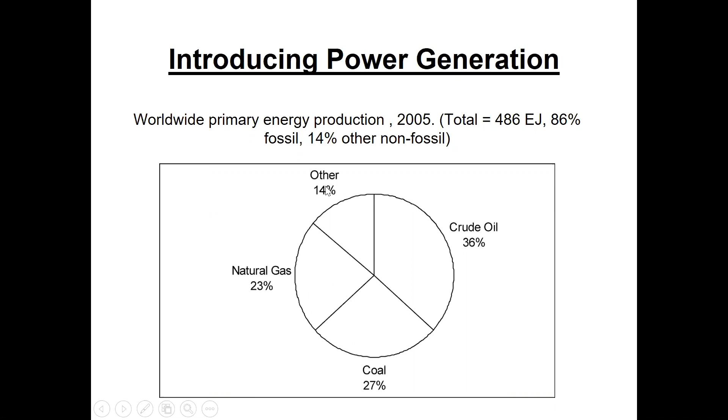Natural gas also in our Middle East is abundant, and other sources may be renewable energy like solar, wind, tide energy, and other forms.

The challenges facing the world at the moment include the increasing demand due to increase in population. This is always the case in all countries, especially young countries like in the Middle East.

Our population is young, or young men who will create families and have more population.

Also in countries like ours, we are building new cities, new industry. We have industrial city 2 in Jubail, in Jazan, we have Neom now.

All these need power generation to support the development.

Also declining economically, the recoverable supplies like oil and natural gas are being depleted. It is not renewable. They are being consumed, and consumed now at a higher rate than before.

Also the global climate change, where the temperature of the earth or the globe is going higher than normal, due to the accumulation of greenhouse gases like CO2 and other gases that accumulate in the outer space of the Earth.

This represents a blanket that allows sun radiation to come in the morning and doesn't lose it by radiation at night. Normally, sun radiation comes in the morning, and the Earth loses it at night to the dark sky, so the temperature is balanced.

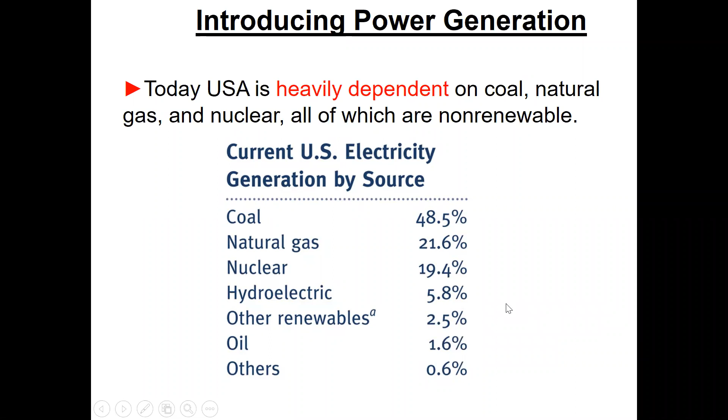Of course, we have here in Saudi Arabia, if you want to know what is the main source of energy we are relying on now, simply oil and gas.

But the kingdom, according to 2030 vision, is going to increase the renewables.

We hope to reach maybe 20% by 2030, and that's why K.A.CARE is taking care of this, and also K.A.CARE is taking care of nuclear. This link gives an idea about the sources of energy in Saudi Arabia.

If you are interested, you can open this link. Again, related to energy, the possible energy conversion of different sources - for coal, because coal combustion always produces soot and is very dirty.

I mean, from a combustion point of view, that's why we don't use it with gas turbine, but we use it with a boiler, which is mainly Rankine cycle.

Natural gas is a clean fuel, so we can use it, burn it, and introduce directly the exhaust gas to Brayton cycle. But can we use coal for natural gas?

Yes, but we have a process first called gasification. We can convert the coal into gaseous fuel, then take this gaseous fuel and burn it as natural gas. They call it syngas sometimes, or synthesized gas, and they burn it like normal natural gas.

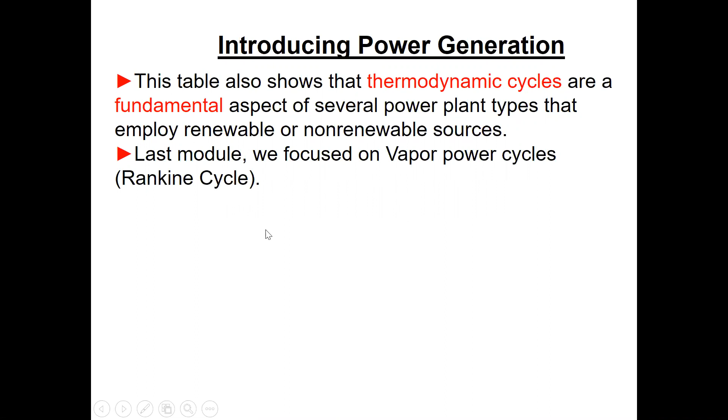This is just to link what is the proper cycle to convert thermal energy into electric or mechanical energy, depending on the source of the energy and what is the suitable cycle. In the table, we show that mainly Rankine and gas turbine cycle are the common cycles. Last module with Dr. Hunter, you reviewed and updated yourself about Rankine cycle. Here we are going to talk about gas cycle, specifically the Brayton cycle, invented by Brayton. For gas power systems, we need to review power cycle in general as a concept.

Also, the process diagram gives us a relation between two properties, like pressure and volume, or temperature and entropy, or enthalpy and entropy — showing how two properties vary together with respect to each other during the process. This is what we call a process diagram. Commonly we use PV diagrams and TS diagrams. What does the area under the curve mean in each diagram? We'll quickly go through it.

And the ideal gas relation, since we are going to talk about gases, for simplicity we need to treat gases as ideal gases. Especially since we have air in the cycle, right? And in the gas turbine we use air. So the ideal gas model will be quickly revised.

This is the concept of a thermal cycle, like your car engine, gas turbine, or steam turbine cycles. You have a source of heat at high temperature, usually transferred to the fluid in your cycle. In this box, there's a cycle, either steam or gas. You heat your fluid and then make it rotate a turbine, a gas turbine, or a steam turbine, or even rotate your car engine, and take work out.

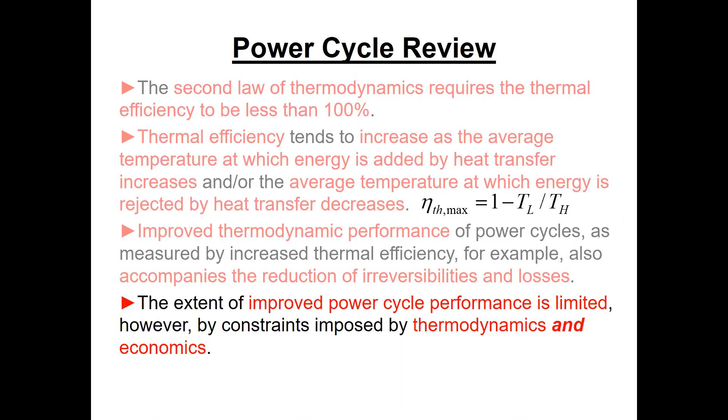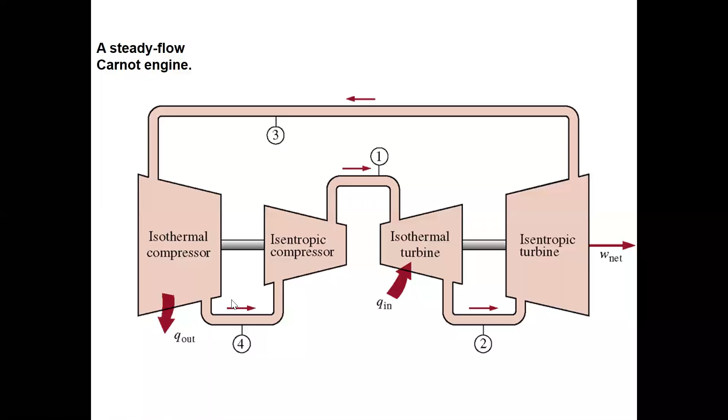Anyway, Q in is T high times delta S according to the definition of entropy, and Q out is T low times delta S. Dividing to get the work, this is how simply Carnot constructed his cycle to get the maximum efficiency with the very simple expression: 1 minus T low over T high, temperature here in Kelvin, not centigrade. Isentropic means constant entropy, that's why the compression from 4 to 1 has S1 equal to S4, and in the expansion S2 equals S3 in the turbine.

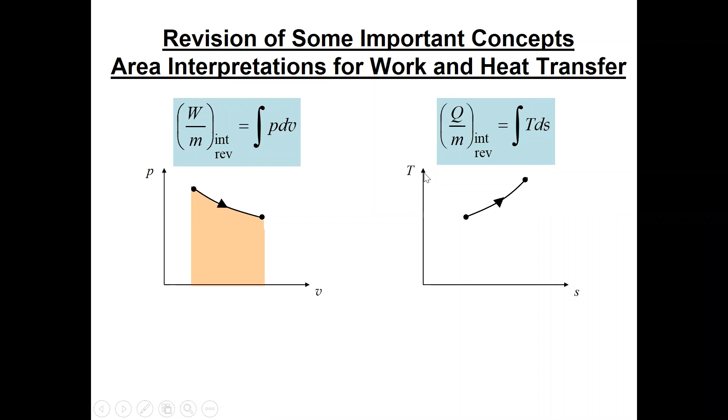We'll focus here on the ideal cycle, which has no friction and no irreversibility. Usually in your car engine, you can present it as a closed system with a piston and cylinder, where the piston is moving within the cylinder, so there is boundary movement or boundary work. The work here is displacement work because the piston is moving. The expansion or compression process can be presented by a PV diagram. If it is isentropic, it takes this shape, and the area under the curve is the work from integration of PdV, and the heat transfer T delta S is Q. So we can represent the area under the curve to give us heat in the TS diagram. This is for a closed system, where there is heat transfer and work, but the work here is due to boundary movement, the displacement of the piston.

But for an open system like the turbine, compressor, or pump, we don't have boundary movement, we have shaft work. The shaft rotates: in the pump we rotate the shaft to push the fluid from inlet to outlet, same for the compressor, but for the turbine, the gas rotates the shaft itself. In both cases, the work is shaft work. On the PV diagram, it is the area to the left of the curve, because it is the integration of VdP.

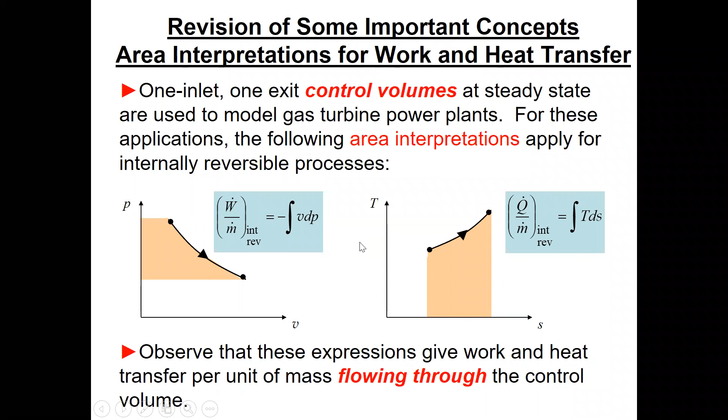And in the TS diagram, this is the area under the curve. This is what we use in open systems, VdP for the work, because we have shaft work and no boundary moving, only the shaft rotates, and the heat transfer is always the area under the curve in the TS diagram.

It is TDS. Now the ideal gas equation, quickly: you have PV equal to RT. This is the ideal gas state equation. You can apply it at any state, at the beginning or at the end of a process.

Change in internal energy is the integration of CV dT, and the change in enthalpy is the integration of CP dT. For ideal gas, you might have a model that assumes CV and CP are constant, not a function of temperature, especially if the temperature change is not high, like in air conditioning applications. So we can take CV and CP outside the integration, giving delta U equals CV delta T, or delta H equals CP delta T.

If CV and CP are variable with temperature, we should know the equation for CP as a function of T and integrate it. Actually, this integration for delta U or delta H is given in thermodynamic tables that I already uploaded.

I uploaded the tables to Blackboard under the properties. A number of these tables refer to the book by Moran and Shapiro that we use in our department, but your course book also takes some problems from Moran and Shapiro. It's a very popular book.

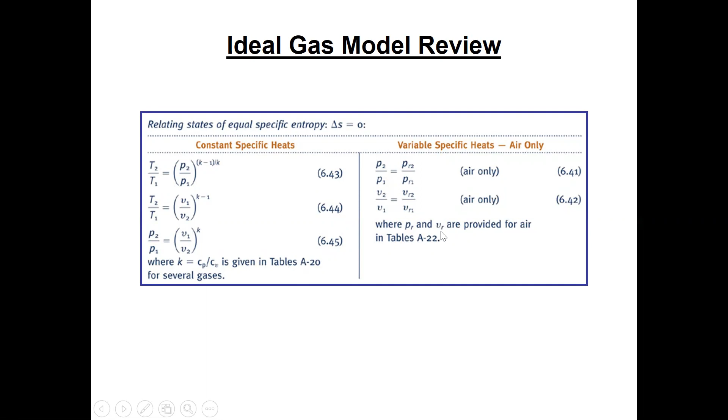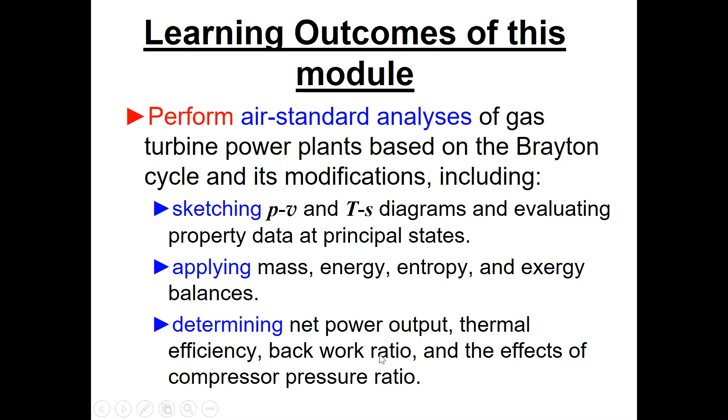Why do I focus on this? Because we are going to use them soon when we analyze a Brayton cycle. We need to be able to draw the PV and TS diagrams, at least to understand them, and apply mass and energy balance for each component. We need to determine the power output, thermal efficiency, and back work ratio. These are important, especially the last part, which you need to focus on: how to calculate or estimate it for a Brayton cycle.

If we have time toward the end of the module, we'll talk about nozzles and diffusers, because the gas turbine is now the main engine of airplanes or aircraft.

Aircraft have diffusers and nozzles because they convert thermal energy mainly to thrust, or jet force. If we have time, we'll cover it. It is a gas turbine, but let me talk about the ideal gas turbine cycle. It's usually used for stationary power generation, but it's also used for aircraft propulsion, marine plants, and trains. Even in Egypt, Dr. Antar knows from Alexandria, we have a train called the Turbine, because it's high speed, so instead of an internal combustion engine, it uses a turbine as the engine of the train.

Gas turbines are now increasing for large scale use. Usually it is used for small scale or quick power plant construction, to produce electricity quickly during a crisis, or when you have a shortage in one of the power plants.

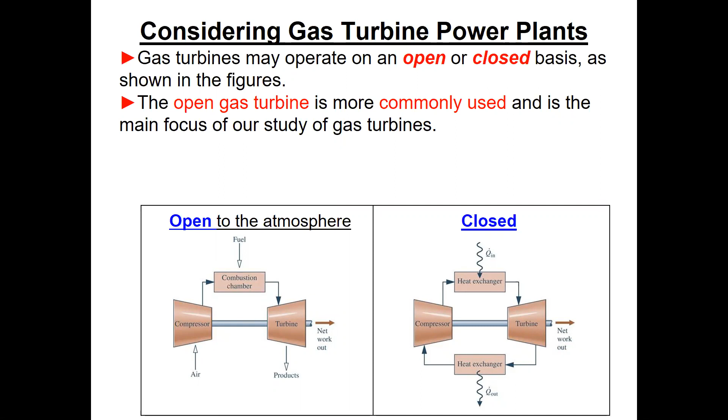What I want to say, for compactness, in some gas turbines, maybe old type, the combustion chamber was not a complete part of the gas turbine envelope. But now to make it compact, this combustion chamber became a box around the shaft. So as you can see, the gas turbine in the aeroplane has one casing. You see this engine on the wing, it is one casing. It includes the compressor, the combustion chamber, and the turbine. Actually, to make it that compact, the combustion chamber became part around the shaft.

But in the stationary gas turbine on the ground that we use to generate electricity, we put an electric generator, and usually the electric generator is put near the compressor. It is on the same shaft, so it doesn't matter whether I put it near the turbine or near the compressor, it is rotated by the main shaft. But actually, because the turbine is hot, and on the physical ground, we put it near the compressor. It is on this side.

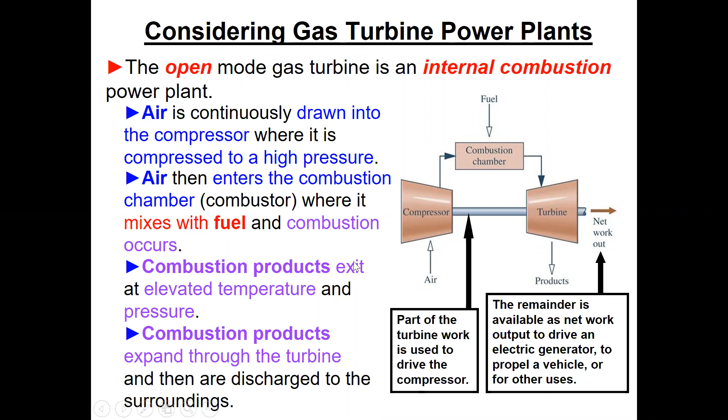Please, who raised his hand? Can you ask your question?

Yes, Doctor, just we mean here about the products, we mean the carbon dioxide, isn't it? It's not only carbon dioxide. This is a very good question. I wanted to talk about it, but I said let me delay. Okay, actually I will answer you.

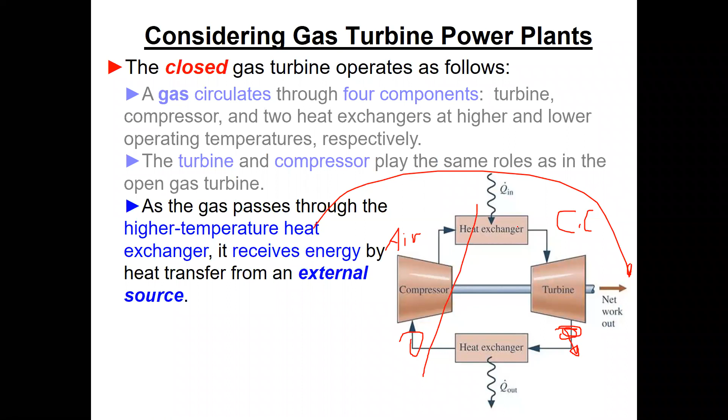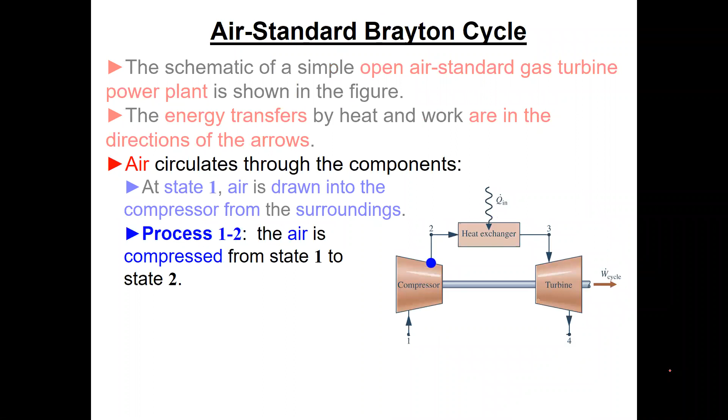So instead of combustion, we assume we have a heat exchanger to give heat in and a heat exchanger to give heat out. This is the actual cycle: take fresh air, mix it with fuel and combust, but we represent it by heating, then expand in the gas turbine.

As we said, in the Brayton cycle the first assumption is that we have air throughout, because it's mainly nitrogen, either on the compressor side or the turbine side. Before and after the combustion chamber, the gas mixture is mainly nitrogen. Also, we have imaginary cooling from state 4 to state 1, from the exit of the turbine to the inlet of the compressor. This is Brayton. In the real gas turbine cycle, it doesn't have this cooling heat exchange.

These are the equations we are going to apply, which is the first law in steady state, steady flow process. We need to apply it for each component. The general formula is Q dot minus work dot equals summation of M exit, H exit plus kinetic and potential at the exit, minus M inlet times H, enthalpy, kinetic, potential at the inlet. Most components in the cycle have one inlet and one exit.

The compressor has one inlet, one exit. The combustion chamber, or heat exchanger at high temperature, has one inlet, one exit. The turbine has one inlet, one exit. So we don't need the summation sign, and we neglect kinetic and potential changes. So we have Q dot minus work dot equals M dot exit H exit minus M dot H inlet. Since M dot is fixed in a closed loop, M exit equals M inlet, so we just call it M. This is the formula we are going to use.

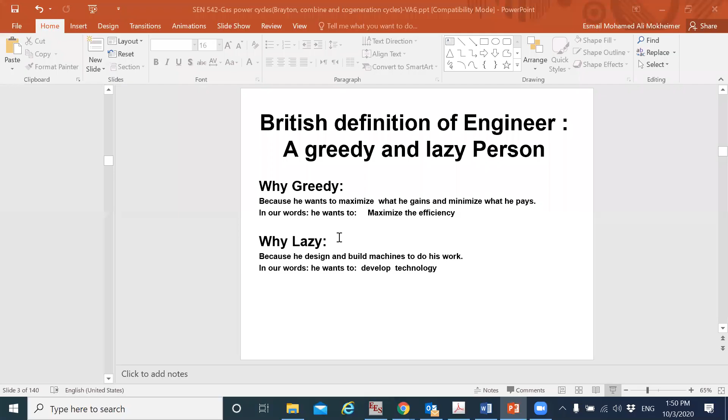Is this the only reason? No, I will talk about another reason - remember the shape of the gas turbine.

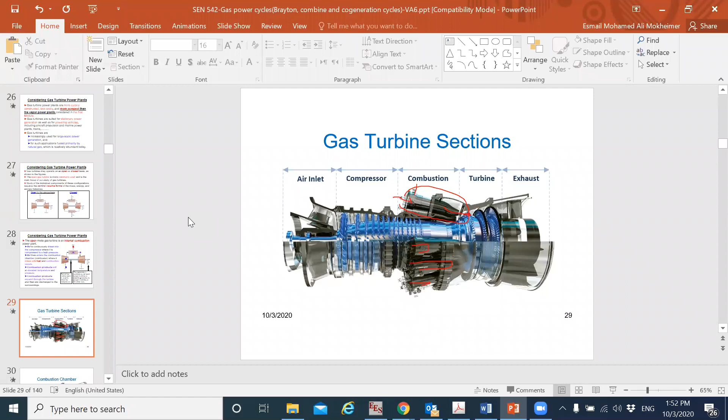If we're talking about gas, the density of the gas is P over RT. So if the temperature is low, we have high density. If the temperature is high, we have low density. So the cooler the air, two things happen.

From this graph, the specific volume is small, so the work integrated, V dP, is less. Also the mass flow rate is higher. So the specific work is small, and the mass flow rate is high. Why do we need the mass flow rate? Because in combustion, for each kilogram of fuel, we need 50 kilograms of air.

If I design my turbine at 15 degrees Celsius, the ISO condition, then for this mass flow rate of air, I can burn this mass of fuel. But if the density changes and the air becomes hot, the mass of air will be less. So I cannot inject all the fuel that was designed for, because I will not have enough air.

If we don't have enough air, part of the fuel will not burn. Due to high temperature, it doesn't find oxygen, so it converts to coke, and this coke or soot will deposit on the blade, creating more problems. So I will not take the energy from it, and it will create problems.

That's why a gas turbine designed at ISO condition, 15 degrees Celsius and atmospheric pressure at the inlet, will not give its full power. The control system works so that if air temperature is low, it gives the designed fuel; if temperature is high, it reduces the fuel so there's enough air, otherwise it creates problems.

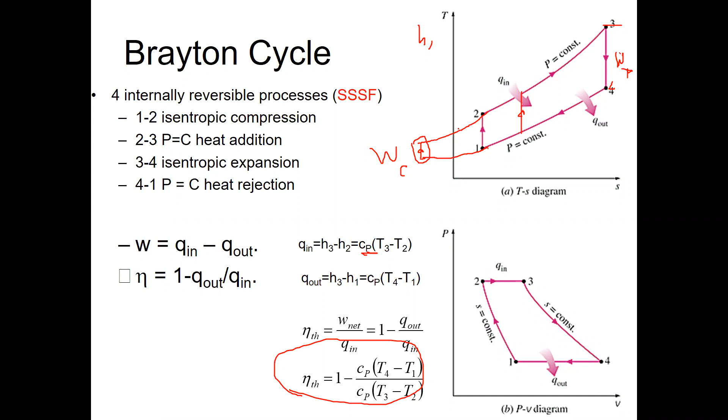That's why the back work ratio matters. If I run my cycle at high temperature, if I have a hot environment and my cycle inlet starts at high temperature like a summer day, the work of compressor will be higher, and the back work ratio, work of compressor over work of turbine, will be high. But if I am at low temperature in winter days, this will give us a back work ratio less than at high temperature days.

That's why even in Qurayyah power plant, they have a combined cycle, that is gas turbine and steam turbine. The gas turbine is designed to give 180 megawatts in winter days or at 15 degrees. But in summer, when the temperature reaches more than 45 degrees, the gas turbine gives only 120 megawatts. They lose 60 megawatts.

Why? Because the compressor sucks the same volume flow rate as it does in winter. In summer and winter, volume flow rate is the same, but in summer the density is low. So they cannot introduce the fuel that they can burn in winter. They introduce less fuel, and this less fuel gives less power.

How much reduction? 30%. I have a paper on this. I put it in your Blackboard in module 4, a paper related to the effect of inlet gas turbine cooling, because people in Saudi are clever.

We have clever engineers. In Mecca, they start to cool the air inlet by using ice. In some other places, they spray water to make evaporative cooling. In some other places, they put an air conditioning system. And what I did in the paper, we compared different techniques.

What is the effect of cooling the air at the inlet? Of course it will increase the power, and power is money that I produce. But whatever accessory I add at the inlet, it costs money too. So you have to study the economics of your project. This will improve the efficiency, reduce the fuel, improve the environment, give me more power, but also I will pay more at the beginning. So you need to compare.

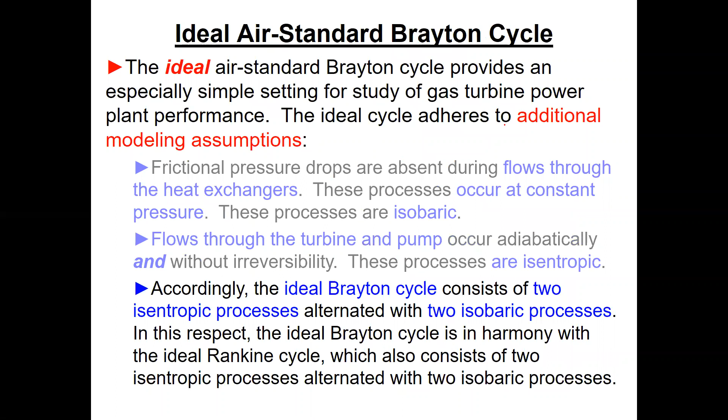I will go, allow me Dr. Ismail. Yes. Sorry for the interruption, but I think the guys may need a little bit of a break. It's okay, like one hour and 15 minutes. So we can stop for how long? 10 minutes? It's all up to you. That's fine if you wish. Yeah, 15 minutes will be enough because I want to give them an example. So we can stop for 15 minutes and I'll go a little faster, but it's okay. Okay doctor, yeah great, I was planning actually to stop at 2. Okay, now it's 2, right. Thank you.

Doctor, excuse me, what's the difference between the Brayton cycle that we have studied now and the car engine? Car engine actually is a different structure, we don't have the turbine. Actually, the car engine, as we said at the beginning, is a piston and cylinder. You have the piston, a cylinder inside it, the piston has an inlet valve and exhaust valve, and the piston is connected to a crankshaft that rotates in a circle, connected by what we call a connecting rod.

When we turn on the starter of the car by the battery, the crankshaft rotates and pulls the piston down, allowing the intake valve to suck in air and fuel. Then it compresses due to rotation, the two valves close, and you have the spark, like in the Otto cycle. Then it burns due to combustion, producing gas at high temperature which expands, pushing the piston to add more power to the cycle. Of course, the starter is separate.

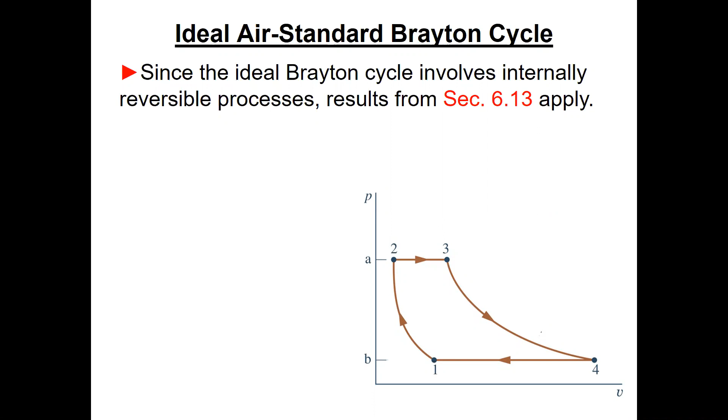The compressor is an open system, has inlet and outlet all the time. Combustion chamber has inlet and outlet all the time. Turbine has inlet and outlet all the time, and all devices work together simultaneously. I have just a cartoon to stress this point that work in compressor and turbine is integration VDP in turbine cycle, because this is the open system or shaft work.

So, to get this more work in the turbine, we should have raised the temperature, because the expansion at high temperature gave us more work. The compression at low temperature gave us less work. That's why we compress at low temperature, we expand at high temperature. This is the science part.

We learn it from the properties of gases. And this is the engineering: when we built the cycle, we made the compression at low temperature and expansion at high temperature. This is the engineering. But to raise the temperature, we have to pay heat. Where is the heat we pay? It is the heat from 2 to 3.

Usually the work we present in PV diagram, because area left to the curve is integration VDP. So it's better to present the cycle on PV diagram. The area inside the cycle here gives us net work, but it is equal to net heat.

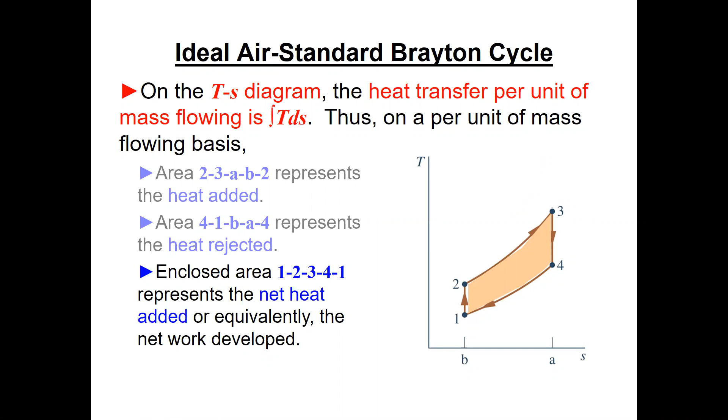Remember that we just present here the process without a scale, but we do have a chart that has a scale. Now we study quickly the effect of the compression ratio.

As I said from the beginning, if I start the compression at low temperature, I consume less work. But if I start the expansion at high temperature, I take more work, right?

But the limitation of the high temperature, which is T3, is the material limitation, because when you burn at very high temperature, you might get the blades of the turbine damaged. That's why in the turbine blades of the airplane or aircraft, we cool the blades.

Even in some turbines on ground, we take some air from the compressor to cool the blade internally. It has a complicated design, the cooling system, but we should cool it internally, just to make the material live longer.

Now, you remember the thermal efficiency for Brayton cycle is 1 minus 1 over the pressure ratio to the power gamma minus 1 over gamma, or K minus 1 over K. K or gamma here is Cp over Cv, and for air it is 1.4 if we talk about constant properties.

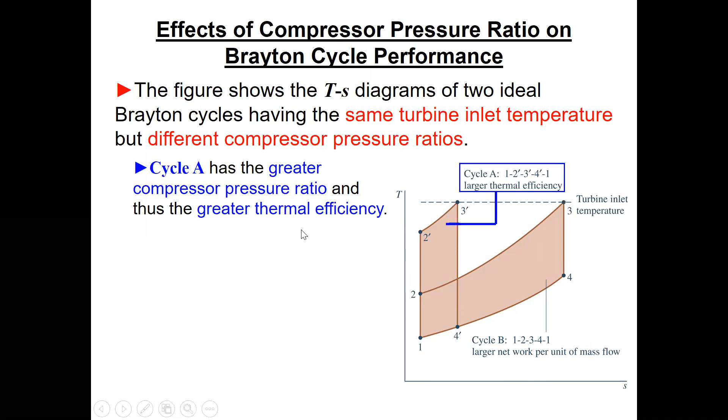I got this derivation actually from what we used to do. Remember, the proper air to fuel ratio is 50. This means for each kilogram of fuel, we need to put 50 kilograms of air. If, due to the temperature, this air is getting less, then I should inject less fuel to keep this ratio fixed.

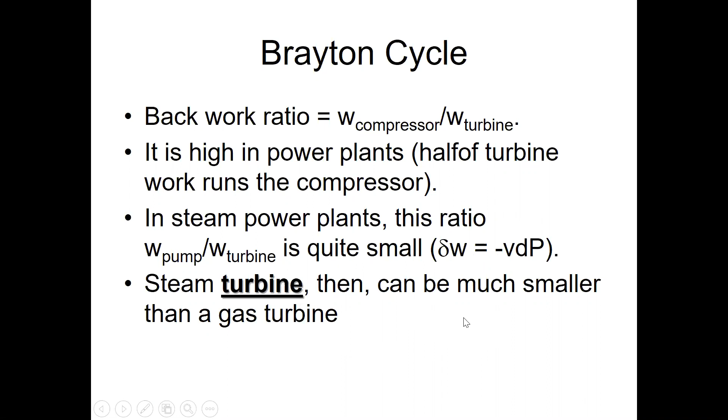Okay, so this is the turbine itself. But the plant, the steam power plant, listen here, when I talk about turbine versus when I talk about the plant - turbine means I'm talking about the turbine part only, this part, not about the plant.

The plant is all this. In the gas turbine, this combustion is around the shaft, so it is very compact. But the turbine here, when I talk about the turbine, for gas turbine for the same power, let's say 100 megawatt, steam turbine might be smaller because the enthalpy content in the steam is higher than the enthalpy content in the air.

Due to a lot of things - steam has latent heat already stored in it, air doesn't, it only has sensible heat.

So what I want to say here is that I can use a small mass flow rate with the same power for steam, but for air I need a larger one. But the plant, for the steam power plant, is much bigger because of the steam generator, the boiler and the superheater - everything is much bigger in size compared to the combustion chamber here.

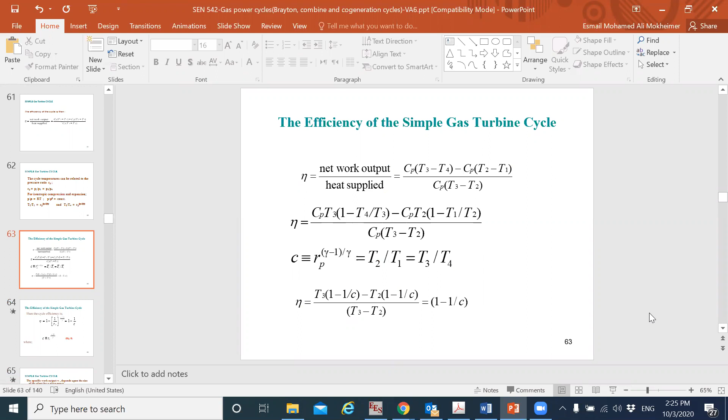So we talk about the specific work, which is work turbine minus work compressor. This is the efficiency, which we have done for constant specific heat. We have this relation: 1 minus 1 over C. Remember, C is the pressure ratio to the power gamma minus 1 over gamma, or K minus 1 over K. Gamma or K is CP over CV. This is for constant specific heat.

For variable specific heat, we use the enthalpy from tables. But the specific work, which is CP times T3 minus T4, work turbine minus work compressor, if we take it as constant specific heat, we might reach this formula.

As you can see here, we have a small t, which is T3 over T1, the maximum temperature over inlet temperature. And we have C, the compression ratio to the power gamma minus 1 over gamma, or K minus 1 over K. This tells you that increasing the pressure ratio might reduce the specific work, while increasing the temperature increases the specific work.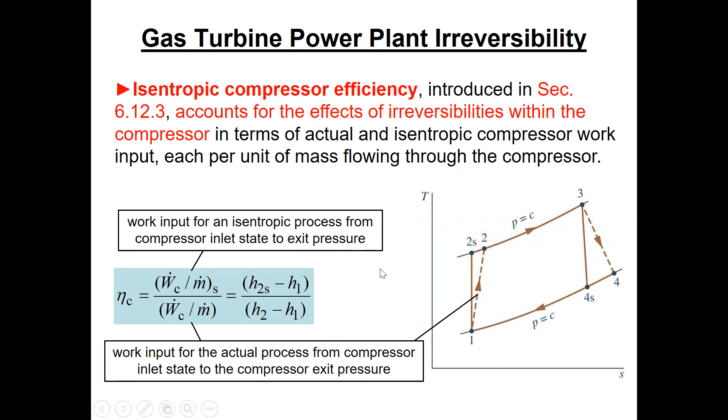So when we take actual cycle efficiency, we take the actual work. I think Dr. Antar talked to you about eta compressor and eta turbine, or eta isentropic for pump and turbine, and it is the same here. We wrote here the eta turbine and eta compressor isentropic, similar to the pump and turbine.

As we said, when we have a high temperature or high compression ratio, we get a high temperature of combustion, and the exhaust will also be at high temperature. That's why we might have regeneration or a combined cycle to reduce the heat loss, because the most part of the losses in the gas turbine is the exhaust gases.

Usually we throw the gases to the ambient at high temperature. To make use of this, either we heat the air after the compressor, or we take this exhaust heat to boil water and install a Rankine cycle. If we take the heat to heat water and build a Rankine cycle, we say we have a combined cycle, gas turbine plus steam turbine. Or regeneration, where we take the exhaust heat to heat the air after the compressor. This is called regeneration. We try to keep the heat inside our cycle.

I have a quick question here. For regeneration, can we heat the air before the compressor? Anyone? Answer, I'll give bonus.

Yes, do better in regeneration cycle. I said we heat after the compressor. Can we heat before, is it better? If you heat before, you will increase the work of the compressor and reduce the density. So it's not recommended to heat the air before the compressor. We heat it after. Who answered?

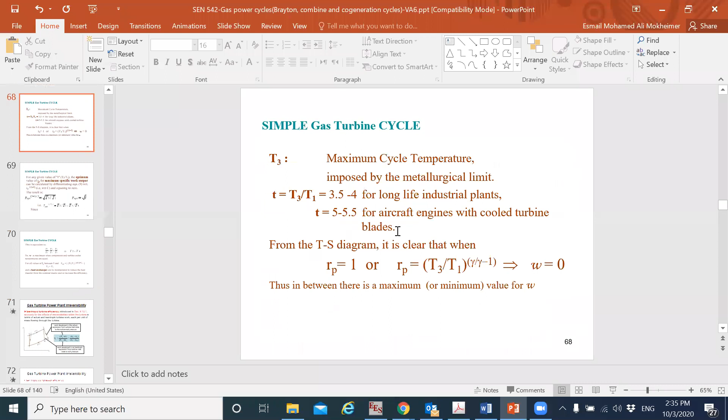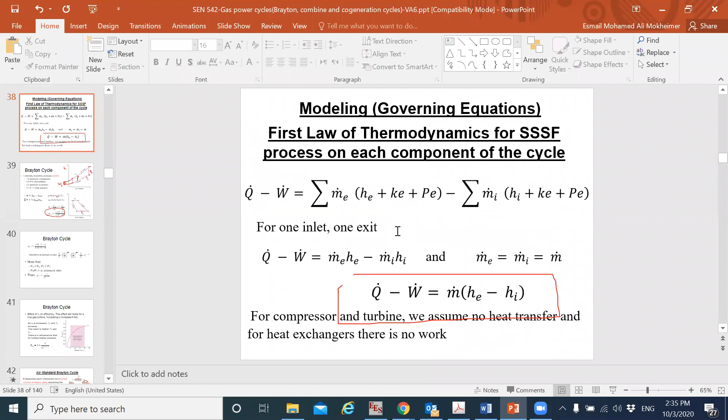Now I want to end the screen share here and bring up the cycle drawing on the TS diagram, so I can take this drawing with me.

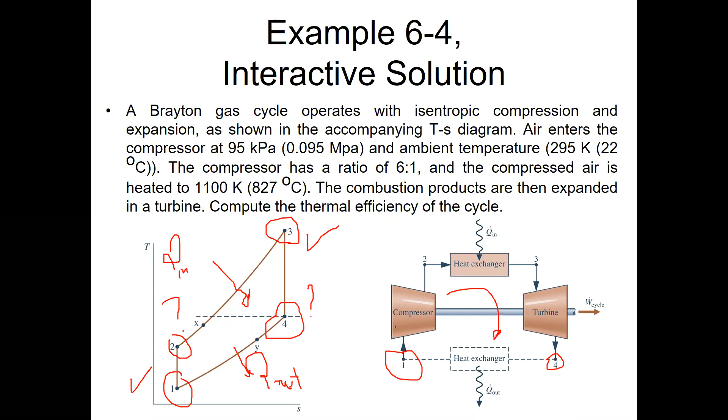So we need to apply the isentropic relation, as your colleague said at the beginning of the problem: S1 equal to S2, and S4 equal to S3. This is key, right? But if we assume constant specific heat, can we use the formula for efficiency of the thermal cycle: 1 minus 1 over the pressure ratio to the power K minus 1 over K? Can you calculate it based on this? Can you calculate this cycle efficiency based on constant pressure ratio, constant specific heat, using this formula? Because we derived this formula for efficiency of the Brayton cycle if the specific heat is constant.

Let me use this and do it together in Excel - I like to use Excel a lot. So let us try to follow with me. I just put the formula here to remind me what I want to do. This is the pressure ratio, RP - they said it is 6. And the specific heat ratio for air, K, is 1.4. So what is the efficiency here? Let me make it symbolic to look at efficiency.

Oh, sorry. Doctor, how did you know that air is constant?

I assumed it - this is what Brayton assumed, that we have, as I said, half of the cycle with air in the compressor and into the combustion chamber. During the combustion chamber we add fuel, then we have exhaust gas. The properties of exhaust gas are similar to that of air because it's mostly nitrogen, whether it's air or exhaust gas - so we assume it's air throughout. Second, we know the air properties will vary with temperature, the specific heat will vary with temperature, especially if the temperature difference is high, and this is true in the gas turbine situation. But to simplify life, we assume specific heat constant, so we got this formula for a quick calculation.

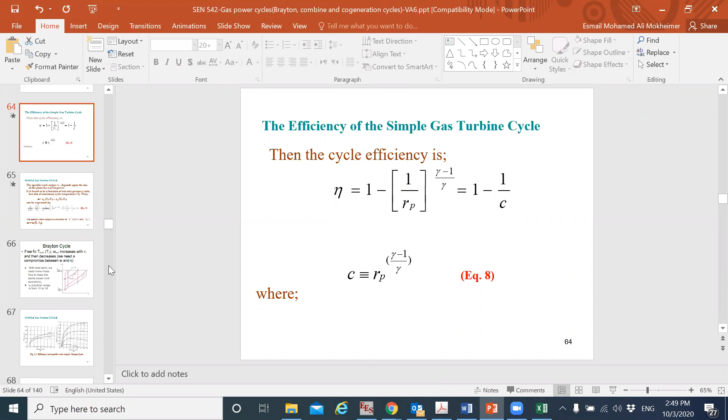How did we know the values of K and RP? This is what experience tells us - I'll show you in the thermodynamic table soon. Of course, some of you have an electrical engineering background and didn't take thermodynamics, so I'm sorry for this. But the pressure ratio is given - in the problem, this RP is given, which is P2 over P1. It's given in the problem. I was giving the pressure ratio.

Remember, he said it is 6:1. Clear? The assumption of a specific heat constant is an assumption, not real, but usually engineers make a rough estimate.

For example, if you are in a tender evaluating the cost of a project and you said it is about 1 million to take the tender, then when you made the calculation, you find it is 1,002,000 or 1,005,000 or 1,050,000. Still what you did is a good approximation, isn't it? So when we make an engineering assumption, that doesn't deteriorate the calculation with a wrong assumption, but it gives me a good idea where we are.

To prove this, I want to share with you how to use the thermodynamic tables. This is the thermodynamic table I put for you on the blackboard.

Doctor, can't we use the website? Yeah, I'll use the website. But as I told you, sorry... we'll use the website together.

These thermodynamic tables have... I don't know why it's not showing. Are you seeing my screen? Why is the table not coming? Sorry for that, my browser is not working properly.

But let us use the variable properties. I'll use the CATT, or you can use a website, but as Dr. Antar pointed out before, it might not be that accurate for the properties, but it doesn't matter. I want to show how to use variable properties, and this is the CATT, the computer-aided thermodynamic tables. You have this software, you can install it on your laptop and use it.

We're not able to install it, Doctor. Maybe it's for Windows only. Maybe, but we can still use the website. I don't know, I tried to use the website yesterday, but I think there's a problem to make the process work, or usually... You mean, Doctor, just for me to get that, you mean thermodynamic calculator?

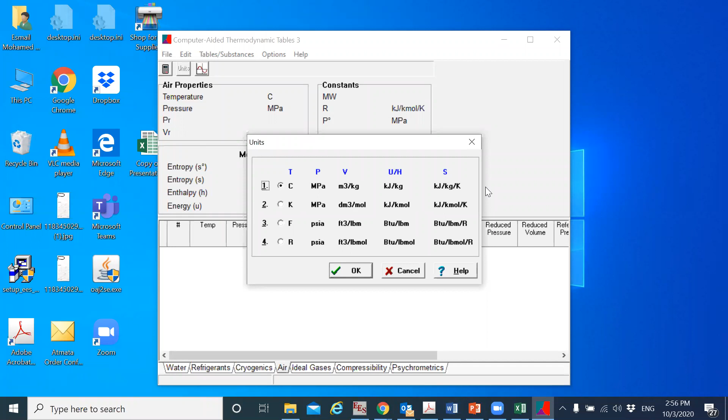Now we need to select the substance, it is air. You can select it from here, table substance. We specified it's air. Now when I come to the calculator, I have state 1, pressure 0.095 megapascal, and temperature 22 centigrade, and calculate.

What it does calculate, it gives me for temperature 22 and pressure 0.095 megapascal, the specific entropy and specific enthalpy. What I'm interested in is the enthalpy. It also gives the internal energy, specific entropy in kilojoule per kilogram kelvin, everything, and it gives the reduced pressure, PR at 1.

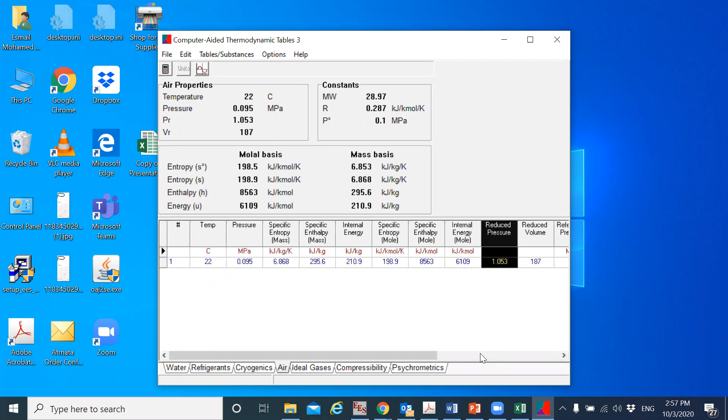Remember, this PR we are going to use to get P2. This PR at 1, what we have actually, let me open a new file. I already solved all this before, let me insert the equation.

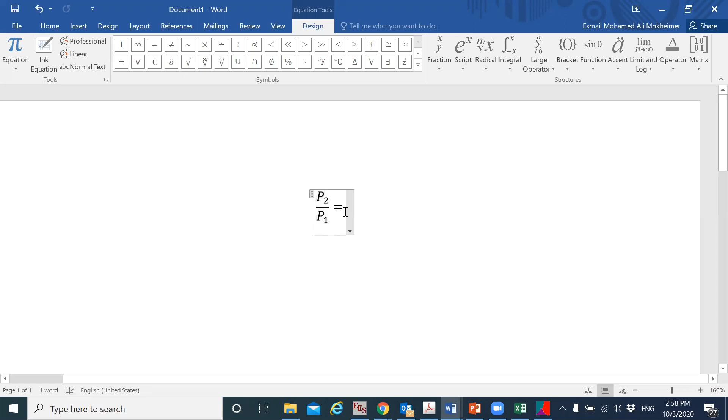We have PR, or P2. Let me write it properly. We have P2 over P1, for an isentropic process with variable properties. This is the equation: P2 over P1 equal to PR2 over PR1.

Now, what he gave us, he gave P2 over P1 equal to 6, right? Are you following with me? He gives this ratio equal to 6. So what we get from here is that...

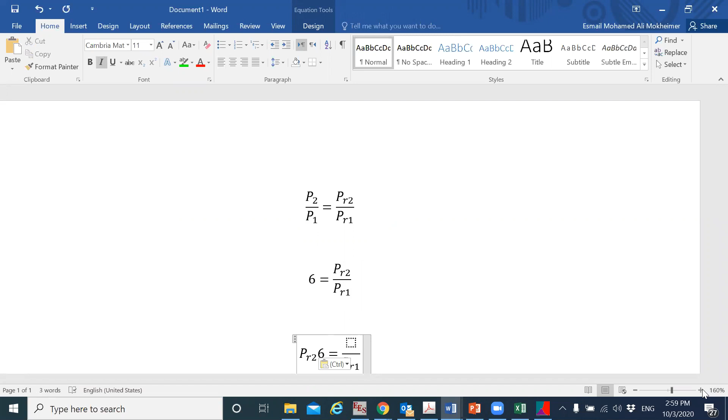PR2 equal to what? Equal to 6 times PR1, right? What is PR1? PR1 from the thermodynamic table, he said, is 1.053, or 1.05.

So it is 6 times 1.053, equal to how much is this? Can you calculate and let me know? This is 18... 6... 18, 6... 6.31. 6.31, right? Yes, now this is PR2.

I'll take this PR2 and come here to the thermodynamic table. I want state 2. At state 2, what I have is pressure 6 times this. What is 6 times this?

0.095 times 6, how much? 0.57. What is the other property I should put here, the reduced pressure? How much? We said it is 6.31. So we introduce the pressure 0.57 at state 2, and this is the reduced pressure at state 2, isn't it?

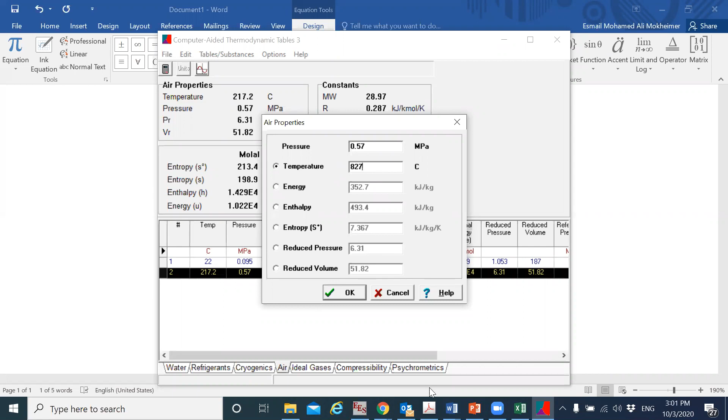Now at state 3, what we have is the pressure is 0.57 as it is, but the temperature, he said in centigrade, is 1100 Kelvin or 827, right? 827 centigrade, he gave it. You see in the problem, the temperature is 827 at T3. So on thermodynamic tables, I put the pressure, which is 6 times P1, then I calculate. So state 3 is given here, right?

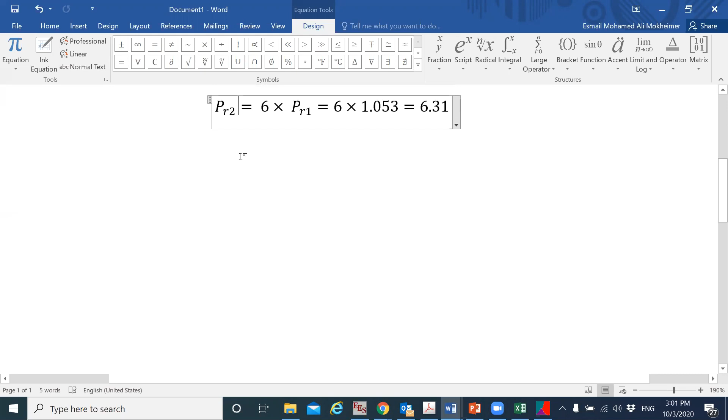Now at state 4, what I need to know is similar to state 2, we can repeat all this. But I'll do it for state 3 over state 4. Let me put it as 3 over 4, equal to PR3 over PR4.

So I know the pressure at 4 is 0.095, right? But to get PR4, I need PR4 to get the enthalpy. So this ratio, P3 over P4, is 6, equal to PR3 over PR4, right? So if I need PR4, how much will it be? PR4 will be PR3 over 6, isn't it?

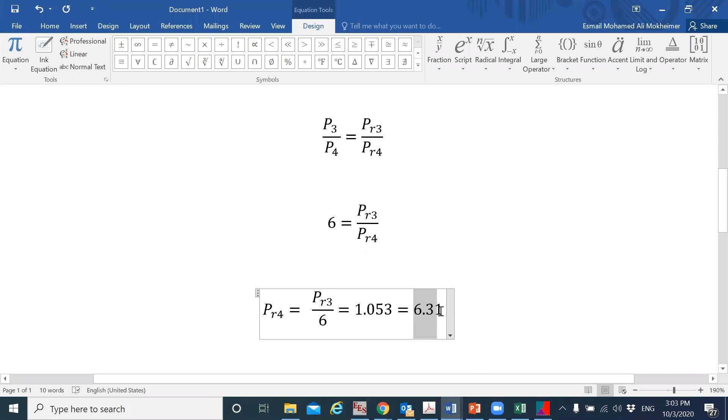PR3 over 6. So how much is PR3 here? How much PR3, ya shabab? 134.3. So we come here, it is... let me make it 134.3 over 6. How much is this? 22.3. Yes, okay, actually it is 22.3833 if I remember. Yes.

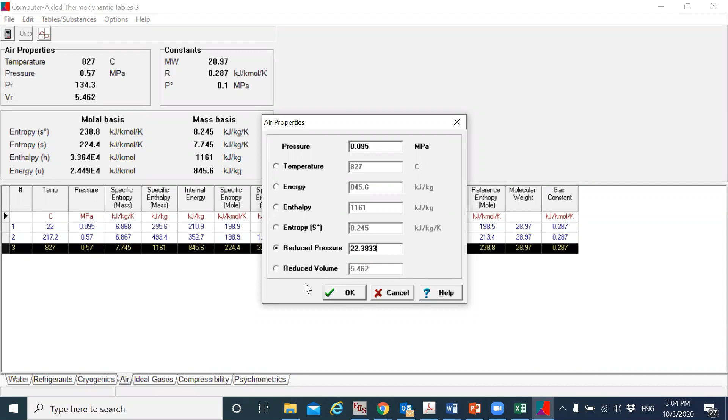Correct, right. So we take this and go to the thermodynamic tables calculator, and we calculate state 4. What we have in state 4, the pressure is 0.095 megapascal. What is the reduced pressure? 0.095 and 0.57, this is already known, given to us, right? Yeah, given from the data given. Okay, thank you. And this is PR, we just calculate it, and then we have state 4.

Now, actually, to make my life easier, I can take up to the enthalpy, right? Because we need the enthalpy, that's what we need in our calculation for the efficiency. I can copy it and put it in Excel.

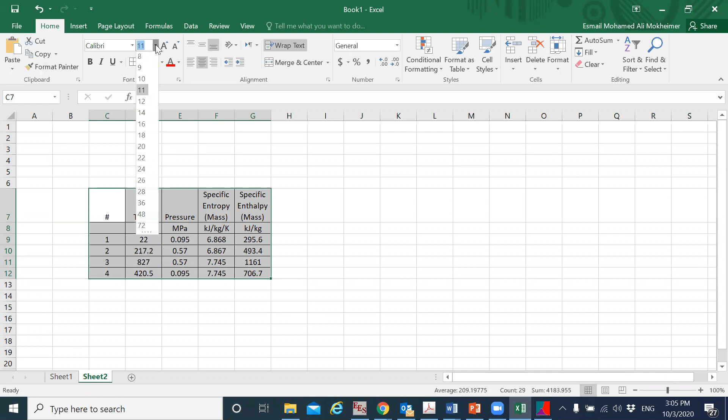I can have another sheet here, put it here. I can make my table fine, nice. I can grab the text to save it. Format cell, alignment, wrap text. Then I have this centered. I made my life nice by using Excel. Just make it bold. Then what we have, the efficiency.

Again, let me get from here the expression for eta, for variable specific heat now. Let us take for variable specific heat from my presentation. What is the efficiency? I can take this, isn't it? Work net over Q added. So I will take it here, just remind myself what I want to do.

So I'll take efficiency here, copy. Equal to what? First bracket, H3 minus H4. Where is H3? This one. Minus H4. Where is this H4? Is this one. This is the work of the turbine minus work of the compressor, which is what? H2 minus H1. Close the bracket. Close the larger bracket, divided by Q in, which is H3 minus H2. Close the bracket. This is how much?

38%. So for constant specific heat, we calculated 40%. For variable specific heat, it is 38%. Right? Now the difference here is what? 2% in estimating the efficiency.

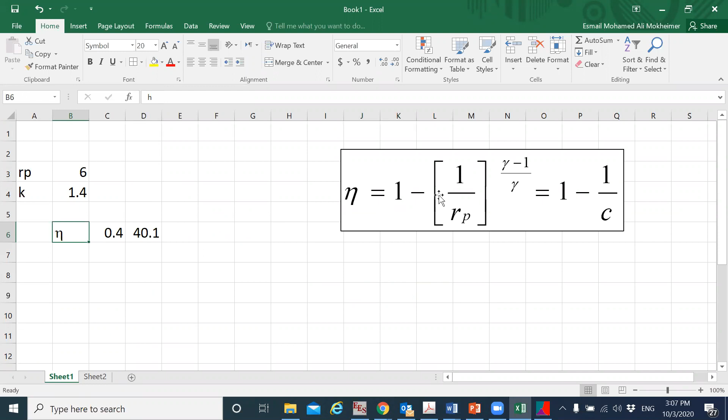But here, with a quick calculation in my calculator, and here I tried to use the thermodynamic tables, and I took time, or even I made a small EES code to give us the efficiency. You got the point? That constant specific heat saves a lot of time, but variable specific heat gives you accuracy, but it needs time for calculations. So if you are in a meeting and you want to give a rough estimate to the committee, you can, while you are sitting, use your mobile calculator and get this 40%, right?

Again, I showed you here quickly how to use the simple formula, and this is simple Brayton cycle. But where is this 60%? Where has it gone, this 60%? Part of it was in the work of the compressor, right? Part of it in the heat loss. You see the enthalpy of the outlet gas, 700.

But when I take fresh, I take air at 295. This 400 kilojoule per kilogram I'm losing. You see the difference here between enthalpy of the gas, air at inlet of the compressor, and enthalpy of the gases we throw away. This 700, this is about 300. So 400 kilojoule per kilogram, we lose it. This is a big loss. This is a big loss. Even though it is more than the work of the compressor, isn't it?

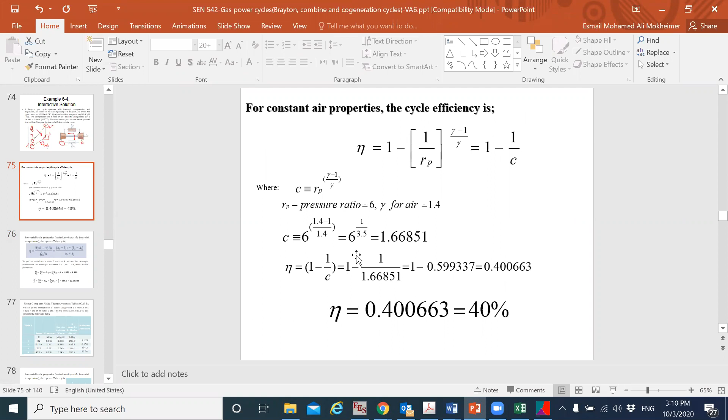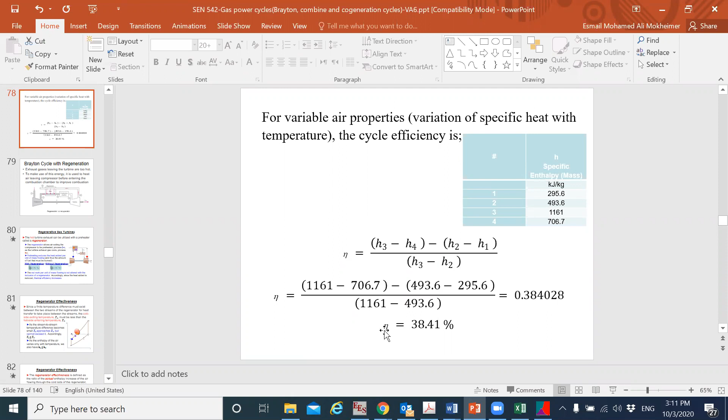And then I put here the equation of the efficiency, because we focus on the enthalpy. I took part of the table and put it here. So this is how we solve or improve or reduce the losses.

We said before that I throw the exhaust gas at the exit of the turbine to the surrounding. So why not, since I'm going to add heat by combustion to these gases before the combustion chamber, take some of this heat before we throw it away to the chimney? So we put a heat exchanger. This heat exchanger is called regenerator. The purpose of this is to keep some of this heat inside the cycle.

So if I need to raise the temperature T3, since I heated part of the air from 2 to 5, then to raise the temperature to 3, I will burn less fuel. You understand? Because the heat, I added part from the exhaust gases and part from the fuel, but I want the sum to give me the same enthalpy at 3.

So this regenerative cycle, actually in most of the gas turbines I have seen, they don't install it. They don't install this regeneration because it complicates the plumbing of the cycle and the gas turbine, and usually it is compact. But they do have another approach: to take this exhaust gas to boil water and use this water in a Rankine cycle that we are going to study soon. But this is the regenerative cycle schematic diagram.

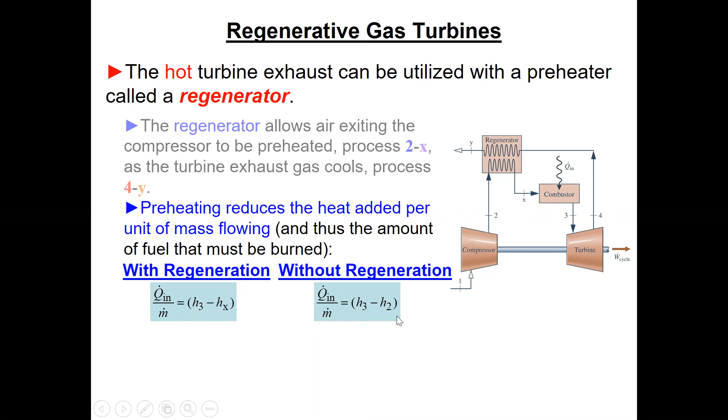You can see this on the TS diagram. We were heating all the way from 2 to 3. Now we are heating from X to 3. And usually, since the heating gas is the hot gas at T4, which is always higher than T2, then the cold, or relatively cold, air cannot, at maximum when we heat it from 2, reach what?

Can it reach T4? It cannot exceed T4, can it? Tx can be maximum equal to T4. It cannot go more than T4 because the hot gas is at 4. And the hot gases will be cooled to Y, but Y can always be higher than T2 — minimum it can go to 2, right? Doctor, now, will the temperature at 4 be the same as at X?

Maximum X can go to 4. Because I have, let us say, hot gas and cold gas. Cold gas coming at 2, right? Remember, they have almost the same mass flow rate. So the cold gas cannot be heated to a temperature higher than the heating gas, isn't it?

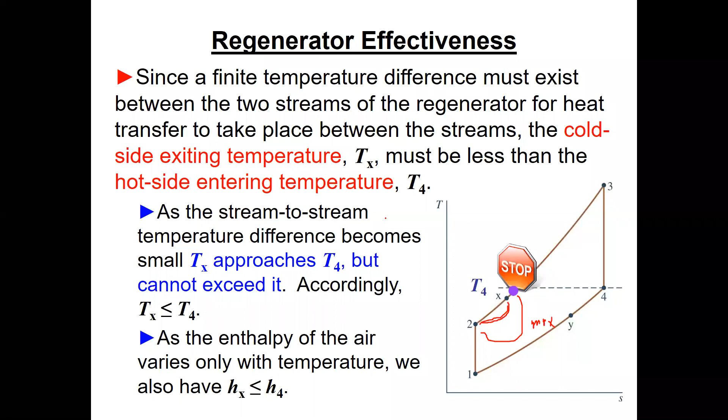The maximum possible is that the cold gas reaches T4, but it doesn't - it reaches only Tx. So this ratio of the actual heating of the cold gas over maximum possible - this is the maximum increase in temperature, right? Cold gas coming from 2 would be heated up to T4. But in reality, because the heat exchanger isn't infinite in surface area or very long, we heat only up to Tx, which is a little less than T4. So this ratio between actual and maximum possible, we call the effectiveness or efficiency of the heat exchanger. Here they call it eta regenerator.

So this is another cartoon to define what is Q regenerated and actual Q in now. Instead of heating from 2 to 3, we are heating only from, let's say, 5 to 3. Instead of X here, we call it 5. 5 prime is the maximum possible, right? But actually, we go up to here.

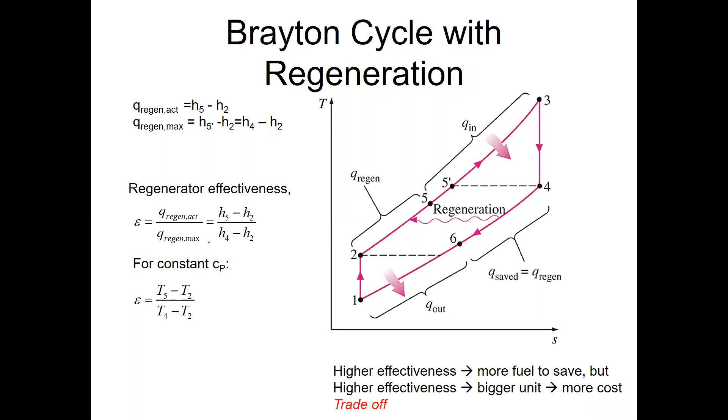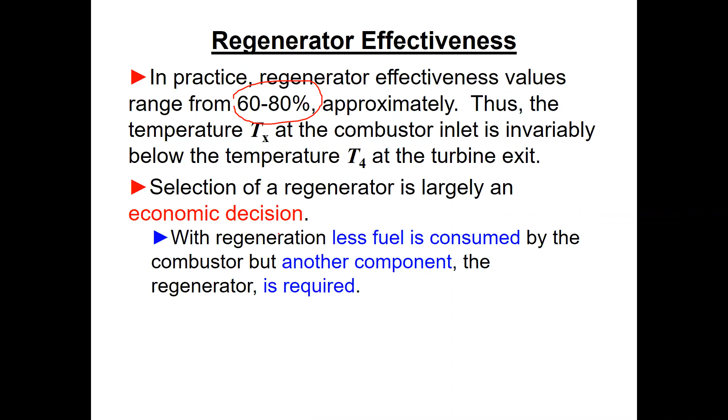Of course, Tx here - usually the effectiveness or regeneration efficiency is in the range of 60 to 80%. But 60% means a small heat exchanger, or 80% if you have a larger surface area heat exchanger. The benefits of regeneration: we burn less fuel, as we said - this is most important - and of course it increases the efficiency.

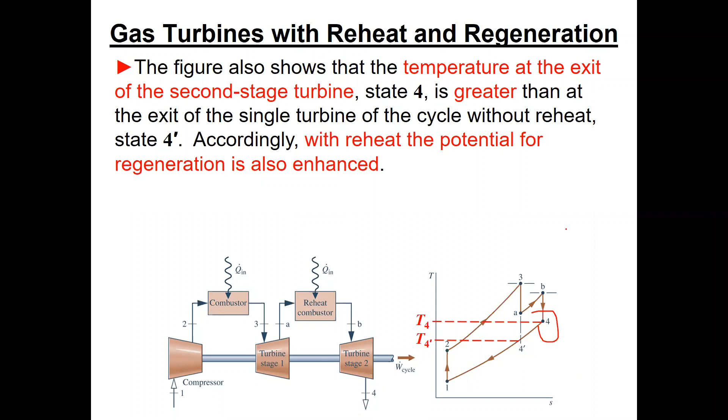Especially if we have reheat, because we increase the exhaust temperature, we should have regeneration. If we have reheat, this means the exhaust gas will be at high temperature, so it's better that if you have a reheat cycle, you add regeneration to it.

And this is if we'd like to have intercooling to make benefit of this physical phenomena: that pressure lines converge at low pressure and diverge at high pressure, meaning expansion at high temperature gives more work, and compression at low temperature consumes less work.

This is actually if I made the compressor in 2 stages. First stage, I compress from 1 to C, then cool down in a cooler, reject heat, then compress from D to 2. So I reach the same pressure on the PV diagram, but you see this hatched area of work I saved due to intercooling. We save work because we make the compression in 2 stages and in between we cooled the air.

In large compressors, they do this. If you have a compression from 1 atmosphere, which is 14 psi, to about 3,000 psi, this has happened in SABIC for compressing and liquefying natural gas. You raise the pressure very high, but they don't make it in 1 stage, they make it in different stages with intercooling to reduce the work in the compressor.

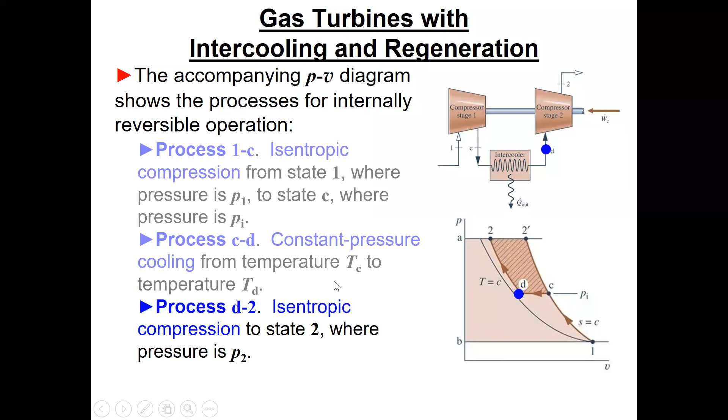But for a small compressor, we don't do this. So this is the real work I pay when I have intercooling: before, I had all this work plus the hatched area, so we save this. This is if I don't have intercooling, if I compress in 1 stage from 1 to 2 prime.

But now, if I have intercooling, we compress first from 1 to C, then cool from C to D, then compress again from D to 2. So I save this area, I save this work. This is usually the cycles, actually in the TS diagram, if I compress in 1 shot from 1 to 2 prime, or in 2 stages.

Of course, if you continue the second stage from the first stage without cooling, you will consume more work compared to if you cooled.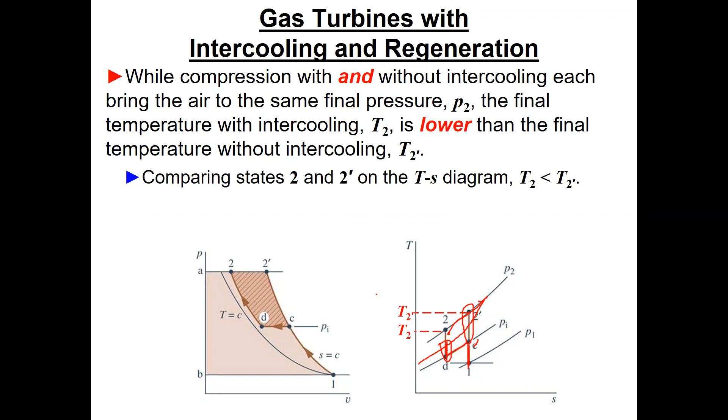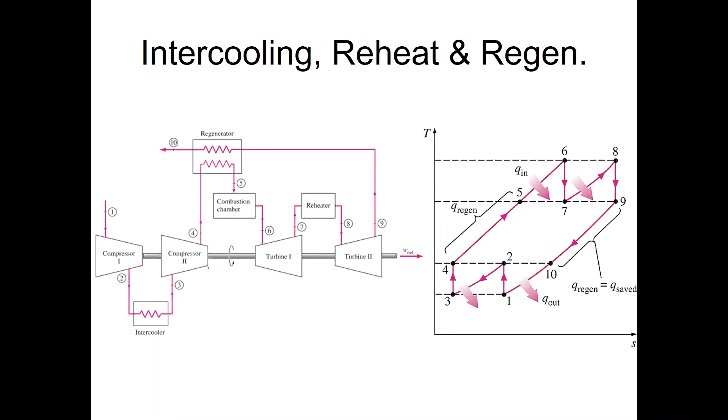So intercooling, reheat and regeneration. If you have reheat, you should have regeneration, but this happens if you have a high pressure ratio between low pressure and high pressure in the cycle. So if you have high pressure, it's better to put intercooling as well. This is the complete cycle, but the more you put heat exchangers in the cycle with reheat and regenerator, the more complicated is the plumbing and piping in the gas turbine. Usually it's not practical. So what they do...

Ya Shabab, do you want to take a little break or continue and finish? No, continue, Doctor. Continue for 15 minutes and then 15 minutes and close.

Actually, in the ideal cycle, if you have many intercooling stages, you come close to isothermal compression, and also if you have many reheat stages, you come close to isothermal expansion. So we have two isobaric processes, heat addition at constant pressure, heat rejection at constant pressure, and two isothermal processes. This is the ideal situation, but as I said, the more reheat stages and intercooling stages, the more complicated the cycle becomes.

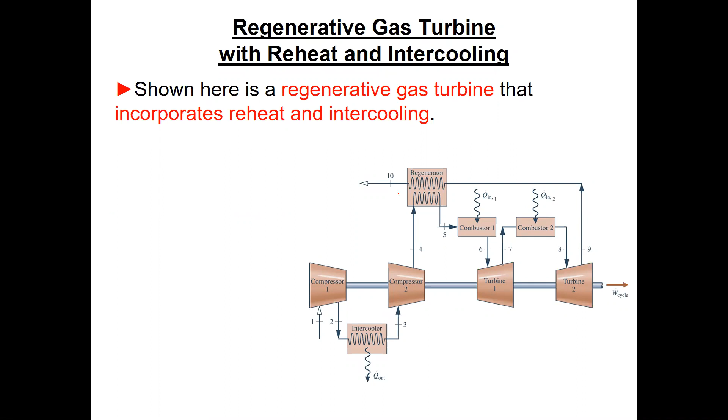This is again a repetition of the reheat, regeneration and intercooling cycle with irreversibility. For the turbine work, you have two turbines, so you take the total work of the two turbines. For the compressors, you have two stages, so you also take the two stages for the net work calculation.

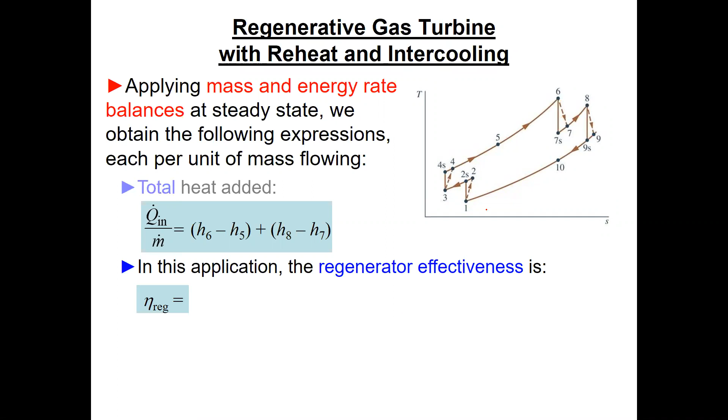Then you also have two heat additions: from 5 to 6 with the regeneration, and from 7 to 8 for the reheat. For the cycle calculation, instead of complicating your simple Brayton cycle like this, usually the turbine exhausts to the chimney. So without complicating your gas turbine cycle, take the exhaust pipe going to the chimney, use it to heat liquid water to boil, and you now have steam at high pressure and high temperature.

You can then operate a Rankine cycle. So we'll have what we call a combined cycle, similar to the simple Rankine cycle taught by Dr. Hunter last module. And here the gas turbine is similar to what we studied today.

Now instead of exhausting from 4 to the atmosphere, you take it to what they call the heat recovery steam generator, which is a boiler, similar to a boiler, then exhaust to the chimney at state 5, which is lower temperature compared to state 4.

So you keep the heat and make use of it, but not inside the Brayton cycle—instead to run another cycle. Usually the gas turbine cycle is called the top cycle, at high temperature, and the steam cycle is called the bottom cycle, because the highest temperature here is close to T4, but here it is T3. This is what we call the combined cycle.

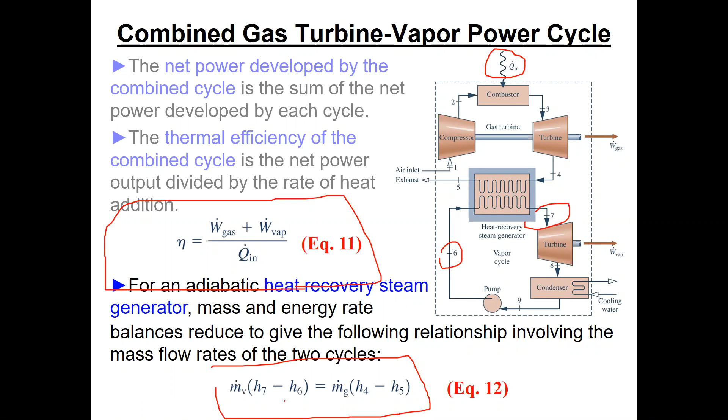Simple, if you know, the steam cycle is simple, the Rankine cycle is simple. Both are combined through the heat exchanger by this: the heat lost by gases from state 4 to 5 is gained by the vapor or liquid from state 6 to 7. Actually, state 6 is saturated liquid and state 7 is superheated vapor, so better to call it the steam side. This is the link between the two cycles—the heat lost from 4 to 5 by gases is gained by the liquid or water in the other cycle.

This Rankine cycle or combined cycle was sent to me this morning by Dr. Hunter, actually from LinkedIn. They have an oil and gas website that I am a member of, and Hunter joining it, we get this. Let us quickly look at it.

This is the gas turbine, the normal gas turbine. This is the compressor, as you can see here, followed by the combustion chamber around the shaft, on which there is the turbine. The turbine actually rotates the compressor and rotates the generator. As I told you in the beginning, the generator is always installed near the compressor, on the side of the compressor, because the turbine outlet is at high temperature.

So the outlet of the turbine, instead of going directly to exhaust, we put this heat recovery steam generator. It's called heat recovery because it recovers the heat from the exhaust. So we put the boiler part followed by the superheater, and then take the superheated steam to the steam turbine, and that rotates the electric generator, taking work from the turbine, and the exhaust from the steam turbine we take it to the condenser.

The condenser can be cooled by seawater or Gulf water if we are in the eastern province, on the Gulf, or on the Red Sea. But if we are in an area like Riyadh, we can cool it with groundwater, and this groundwater we cool by a cooling tower. We can cool the groundwater, and the groundwater will be here in a closed loop. Then the steam of the cycle doesn't mix with the cooling water of the condenser. This is in a loop.

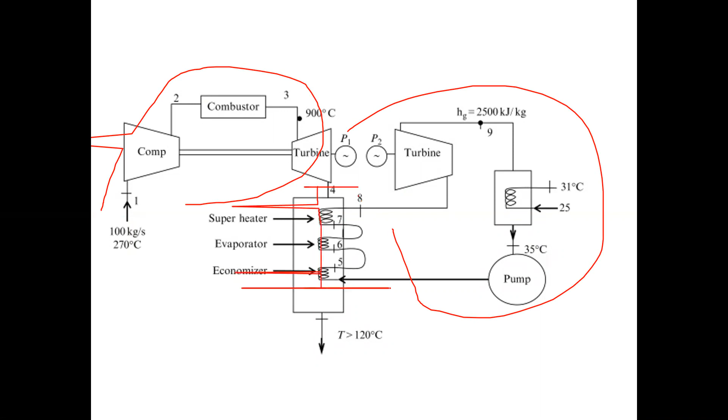This is the gas turbine cycle, and this is the steam cycle, and this is the link between them. This heat exchanger represents the boiler for the Rankine cycle and the heat exchanger for the gas turbine before the exhaust.

Take care that according to the drawing, we use different numbers for the states so they don't get confused. In one equation I wrote 4 to 5 for the gas turbine, but here I use 1, 2, 3, 4 for the steam cycle. So it doesn't matter, they are just numbers, but heat lost by the gases is gained by the steam or water.

In some other applications, we have what we call cogeneration. So still here, this is a combined cycle, and the steam coming from the turbine, I will cool it. Here we are cooling it by groundwater, and this might harm the groundwater if we reject heat at high temperature.

So in some places you can take this heat for industrial processes, like for example the clothes industry, they need hot water for painting the clothes. So they don't want to heat the clothes by direct fire, so they heat it by hot water, and we can take it to industry.

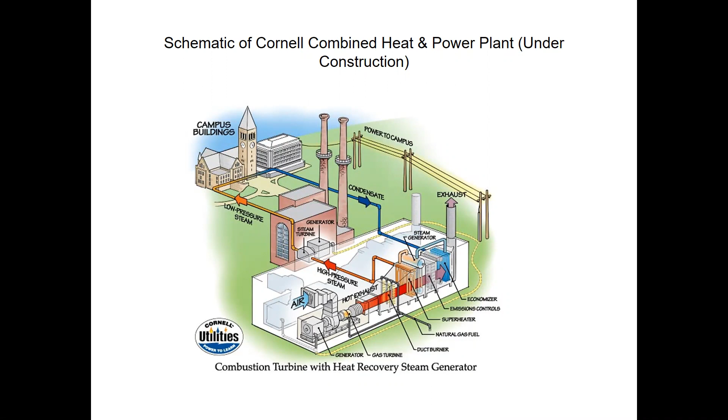In some industries, you might need this heat for an industrial process. You take some steam from the turbine, and instead of using it for regeneration, you send it to the industrial process. So again, the balance here is simple: you get both heat and power.

So the performance of the plant, we don't call it efficiency, but the utilization factor, because you add two values different in nature—both energy, but one in the form of work and one in the form of heat—while you only added heat here in the boiler.

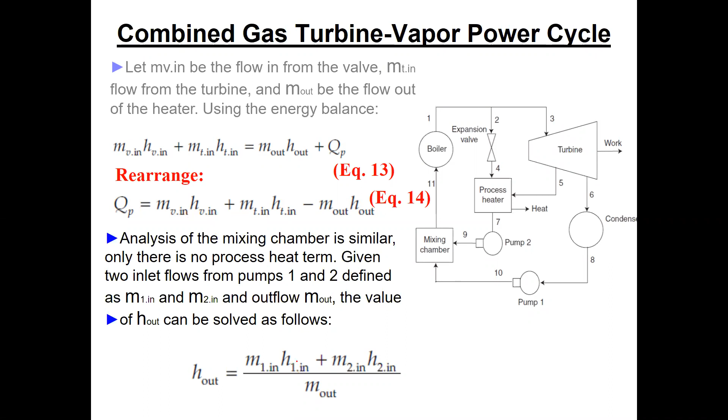Actually, we have here the Azizia power plant and Jubail power plant. They produce power and water because they take the heat here in the condenser, or from the bleeding steam, to make desalination. So here the industrial process in Azizia power plant is for desalination.

So again, we have to take into account economic and energy aspects, and this is what we'll do in next class.

I will quickly say, whether in the gas turbine or the steam cycle, we have a boiler or combustion process. Combustion usually has an efficiency because in the boiler you burn fuel but have exhaust that goes to the chimney—this is losses. Also sometimes you don't have complete combustion; some of the fuel goes out without burning. Then the efficiency of combustion is usually 90%.

Then you have the cycle, either Brayton cycle or steam cycle, with efficiency of 37%. Then you have the electric generator, which also is not 100% efficient. So the overall efficiency of the plant—from the fuel, which has chemical energy, to the electricity output—is the ratio of electric power to the chemical energy in the fuel, which is the multiplication of all these efficiencies: 90 times 37 times 98, giving you 33% for the whole plant.

If you have a system delivering to another system, each system has its own conversion efficiency. Here we convert chemical energy into thermal energy in the boiler, then thermal energy into mechanical energy at the shaft in the cycle, then mechanical or shaft work into electric power in the generator. The ratio of output to input overall is the multiplication of the efficiency of each conversion system shown in front of you.

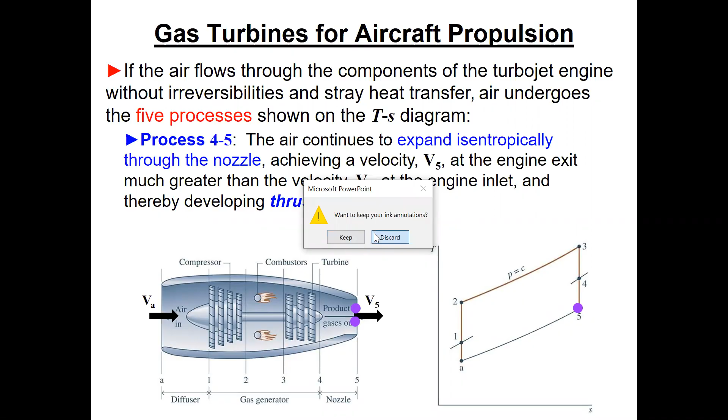Okay, I will stop here and I'll be happy to answer any question. Of course, we are not going to cover the aircraft part much; you can read it. I'll leave it in the lecture, but you are welcome to it.

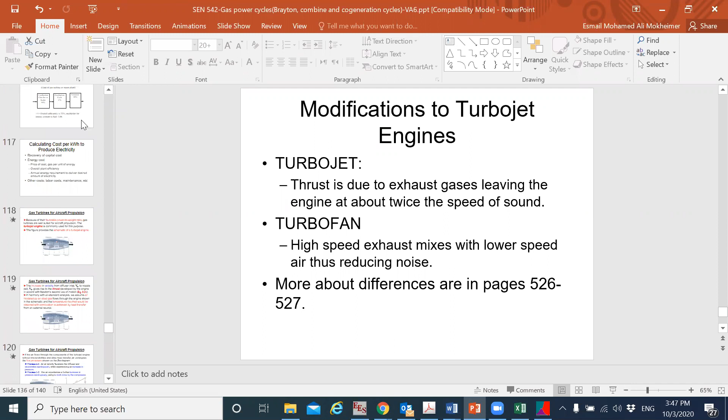First of all, distribute this last part into 4 classes at least, because it's huge information and a lot of inputs. Actually, this part about the aircraft, you are not asked for it from here down. This part is the next module. I mean, this one slide will cover it in more modules.

For solving problems on combined, we solve it as simple cycle, right? But I want you to solve one for combined or for cogeneration. I mean, we can do it in help sessions.

But according to the syllabus, I know the coverage. I just covered the material on module 1, because up to the syllabus, if you can look at it together, here the syllabus, yes.

No, this is not the one. Yes. One minute please, to share with you the syllabus according to what you have.

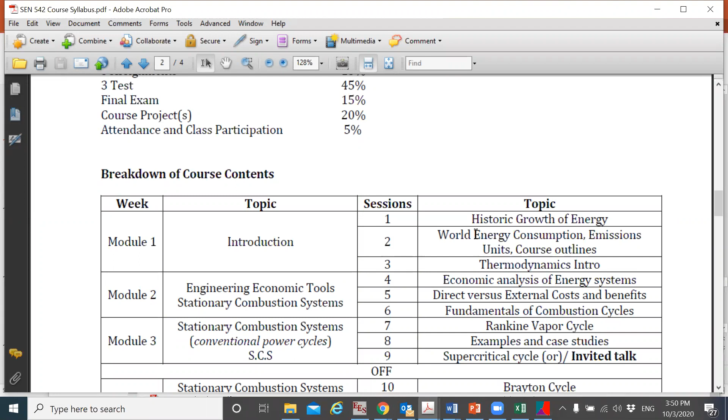Now let me tell you what we cover. We cover Brayton cycle, this is in your syllabus. We covered combined cycle, we covered cogeneration. Did I do more than this? No, yeah, it is these 3 parts.

Now next time, economics, and then environmental impact. And instead of invited speaker, you will have your quiz or exam, I don't know. We can take these to solve more problems. If you don't have the exam on Saturday, you have it sometime else.

Yeah, it sounds good, right? Yes, yes, great, thank you. Great, thank you, Doctor.